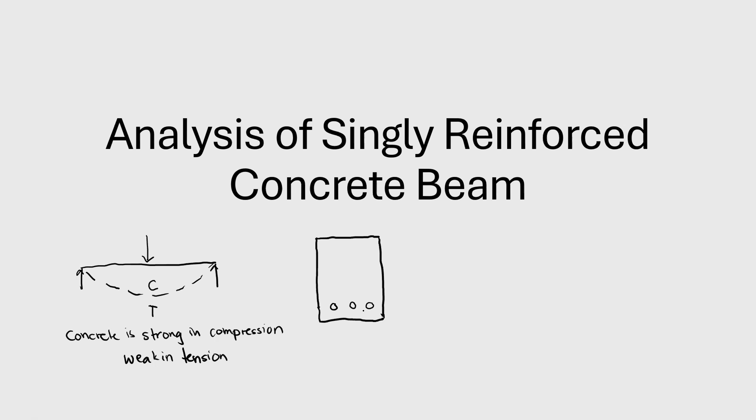For now, discuss muna natin yung pagiging single lang muna. Sa tension lang tayo maglalagay ng reinforcement, sa tension side, ang merong reinforcement. Halimbawa, ito yung ating concrete beam section.

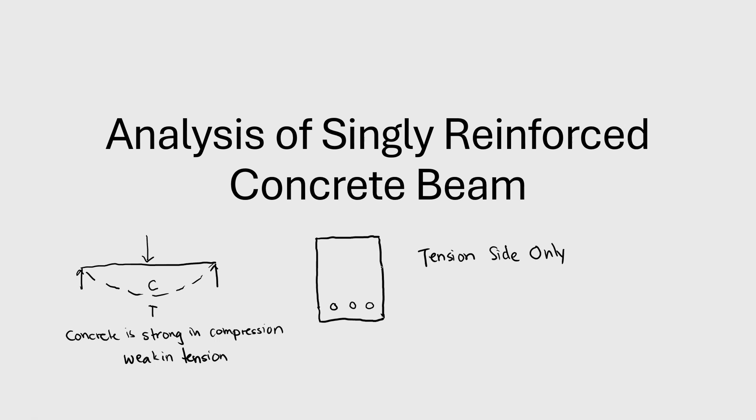Tingnan natin ano yung mangyayari sa beam natin. Ito yung tinatawag natin ang crack section. Initially, meron tayong width ng ating beam, yung B. D is the effective depth of your beam section. At yung AS naman is the area of your reinforcement.

Yung AS natin, we're just assuming or representing it into a single circle, isang circle lang muna. Kumbaga, halimbawa 5 yung bakal na ginamit mo, we can represent it into one single figure, kasi pare-pareho lang naman yung location nila based from the depth of their position. Kung base sa compression side, pababa, puro ang distance lang naman nila ay D, yung tinatawag nga natin effective depth of your tension reinforcement.

Sa analysis natin ng reinforced concrete beam, hinahayaan natin na mag-fail yung ating concrete sa tension, o mangyayari, mababasag yung concrete. Pag nabasag yung concrete natin, kasi weak in tension, ganito na yung mangyayari, magiging crack section na. Itong portion na to sa baba, basag na yan. Kumbaga, wala nang tibay yung concrete at the bottom. Therefore, on this side, ito yung tension side natin.

Kaya yung neutral axis is somewhere here at the middle of your beam section, pero hindi yan saktong gitna ha. Hindi na yan katulad nung homogeneous material na rectangle, na sa gitna yung kanyang neutral axis. Kasi involved na tayo ng reinforcement, may bakal na, kaya hindi natin alam kung saan yung location ng neutral axis natin.

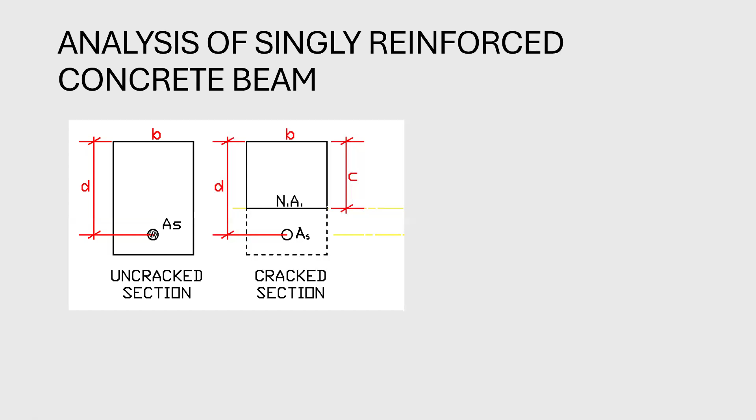Ngayon, kung titingnan natin yan, ganyan yung itsura ng ating section ngayon. Kung remember niyo doon sa ating flexural stress ng ating beam, ganito yung naging stress diagram ng ating beam section. So instead of uniform triangular stress diagram, ang makikita natin hindi na ganon. Sa reinforced concrete, base sa many studies, ganito ang nakita nilang diagram ng ating stress sa ating beam section.

Sa concrete, this is somewhat like parang rectangular, and then biglang nag-curve pababa papunta sa neutral axis until it becomes zero yung stress natin sa neutral axis. And that value is equivalent to 0.85 F prime C. Ano ba yung F prime C? That is your compressive strength or yung compressive stress doon sa ating concrete. Then, yung sa ating bakal naman, don't forget, even though basag na yung ating concrete, may bakal pa tayo, kaya meron tayong stress doon sa ating bakal, which is what we call yung Fs natin.

Yan ang ating stress diagram. Kaya lang, pag ina-analyze natin yan, halimbawa gusto natin makuha yung moment ng ating beam na kinikerry with that value of stress, so doon sa flexural stress natin, yung principle niya, mahirap. Mahirap kunin yung resulta ng ganitong stress diagram, di ba? So anong gagawin natin? Ginawa ng mga engineers, syempre medyo tinatamad sila mag-compute ng ganyan, mag-compute pa ng equation, di ba? So mahirap. So ginawa nila ay minodify nila yung stress diagram into simpler form.

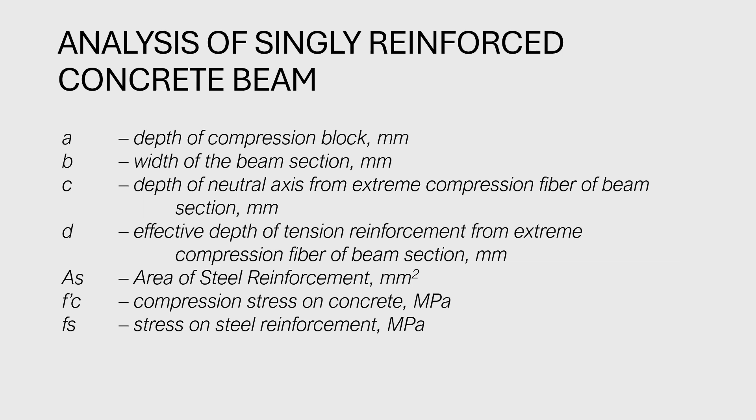Again, yung concrete ay under compression, kaya yung direction niya papunta sa left and then papunta sa right, yung ating Fs. So ito yung tinatawag nating equivalent stress diagram. Then, ito yung mga notation natin para doon sa mga letters or variables na nakikita natin doon sa ating diagram kanina. Ngayon, ito yung binabanggit ng section 422.2 about the design assumptions for moment and axial strength ng reinforced concrete members. So una, sabi, equilibrium and strain compatibility.

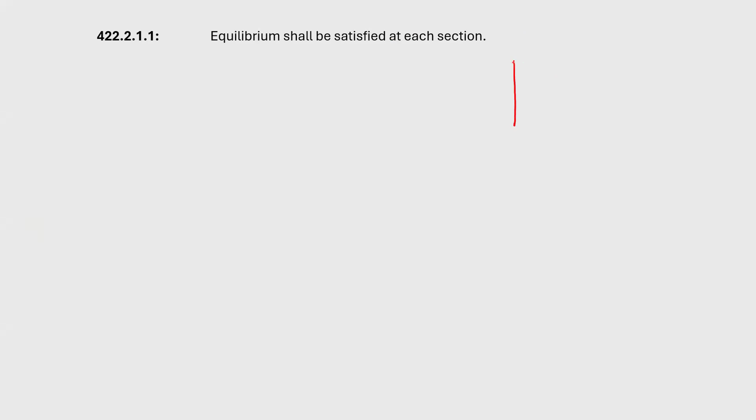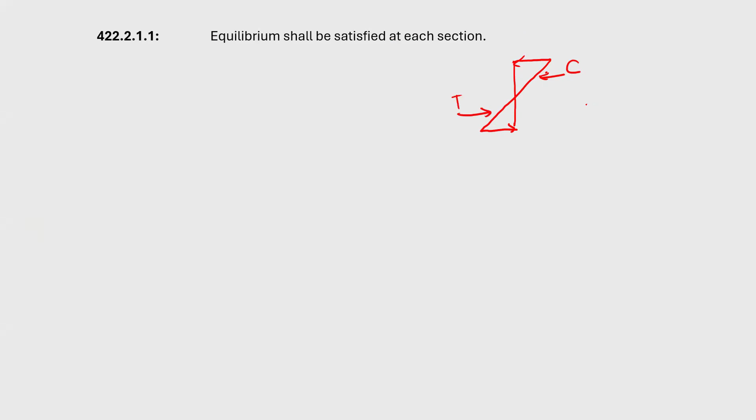So equilibrium, sabi, shall be satisfied at each section. Sabi sa atin, dapat maintain yung equilibrium. Kaya ano ating na-discuss dun sa principle of flexure stress, na sabi sa atin that ganito yung ating stress diagram. Okay? So ito yung compression, ito yung tension. So meron siyang equivalent na concentrated load, and tension. And based on the principle, compression must be equal to tension. Yan yung tinatawag equilibrium, no, at each section. So kailangan magawa natin yan.

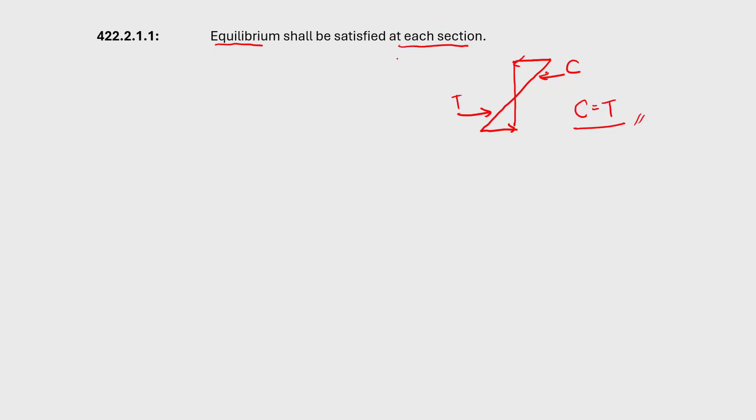Ngayon naman, pag-usapan natin yung reinforced concrete. You remember, ito yung equivalent stress diagram ng ating concrete. Napapansin natin that yung stress dito is rectangular. So therefore, yung equivalent concentrated load niya is nasa gitna. So let's name it as C for compression. Ito naman yung sa tension natin para sa steel. Okay? Again, yung nag-hold ng ating compression ay concrete at yung sa tension naman ay yung steel natin.

Ngayon naman, let's compute yung value ng compression force natin dito sa ating concrete. Balikan natin ulit yung principle ng stress na sigma is equivalent to P over A. And yung force P can be computed using sigma times A. So yung stress natin dito sa concrete is 0.85 FC prime. So therefore, yung C natin is equivalent sa 0.85 FC prime. Okay? Then, aside from that, yung area.

Balikan natin ating figure. So ito yung ating stress diagram. And then, kung ipa-plot natin siya papunta dito sa ating concrete section, so yung area kung saan nag-act yung ating concrete compression force is dito with the depth of A. So yung depth niyan ay A. So therefore, yung area niya is A times B. So yung area ay A, B. So ito yung ating equivalent concentrated load sa ating compression.

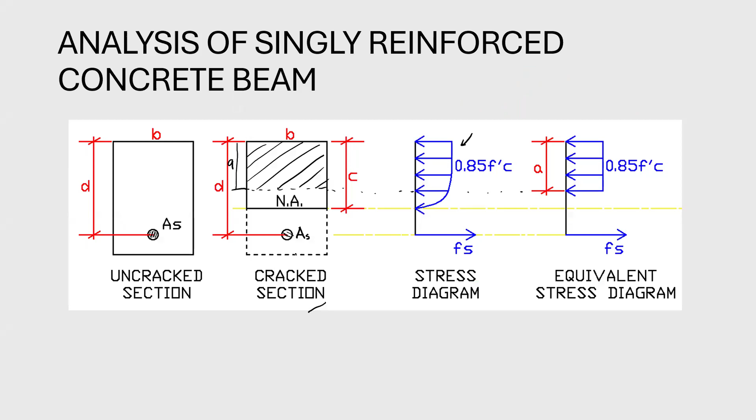Ngayon naman, sa tension side naman tayo. So saan ba nag-act yung Fs natin? Kung ipoproject natin yung Fs, mapapansin natin na yung area is yung sa steel. Dito tayo mag-focus sa crack section. So therefore, yung area is As. So yung Fs natin, siya yung ating stress. So therefore, yung ating tension is equivalent sa Fs times As. Therefore, ito na yung ating compression at tension.

Then, we can perform now yung equilibrium condition. So sabi nga natin, compression is equivalent to tension. Let's say the equilibrium condition. So sabi nga natin that C is 0.85 FC prime AB that is equivalent to AS FS. So ito yung isa sa mga general formula na gagamitin natin when we are analyzing yung ating singly reinforced concrete.

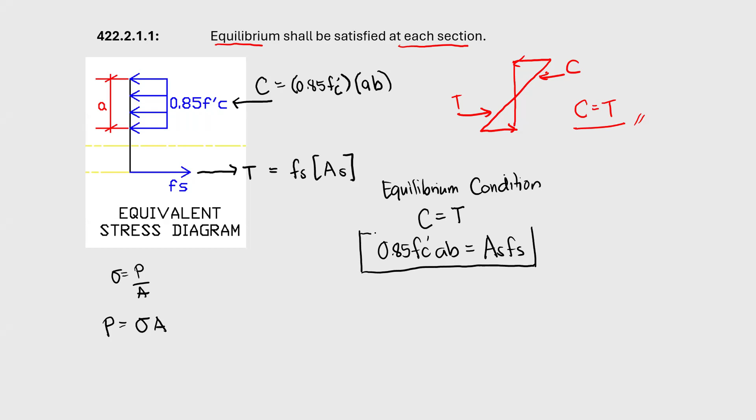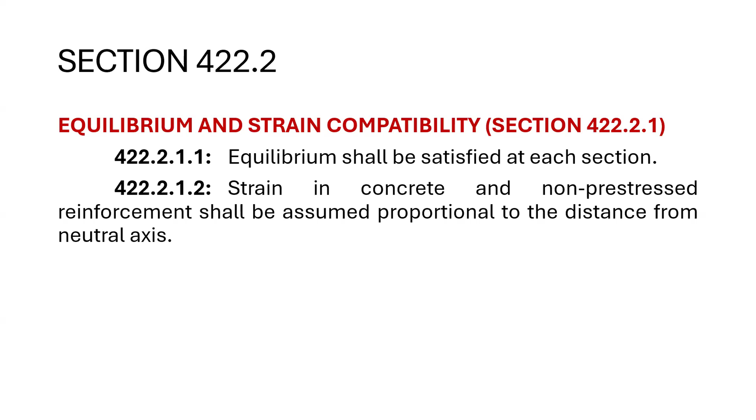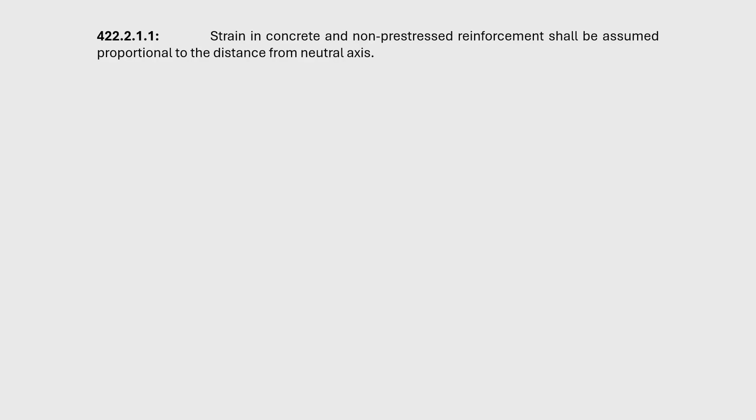Ngayon naman, sa pangalawa, ayon sa section 422.2.1.2, yung strain in concrete and non-pre-stress reinforcement shall be assumed proportional to the distance from neutral axis. Kung sinasabi dito na proportional dapat yung strain ng concrete saka yung reinforcement based from the neutral axis is ganito. Ito yung crack section natin at ito yung strain diagram. So sa concrete, ito yung strain of concrete. And then, habang pababa siya ng pababa sa neutral axis, nagiging zero yung strain. Then, habang papalayo na papalayo ulit, then tumataas naman yung strain doon sa tension side. And ito yung nagiging strain of your steel.

This concept must be applied when we are analyzing our beam. According to Section 422.2, this is the design assumption for concrete.

The first assumption states that the maximum strain at the extreme concrete compression fiber shall be assumed equal to 0.003. So what we saw earlier about the strain of concrete, this is the maximum we can use. We cannot exceed that.

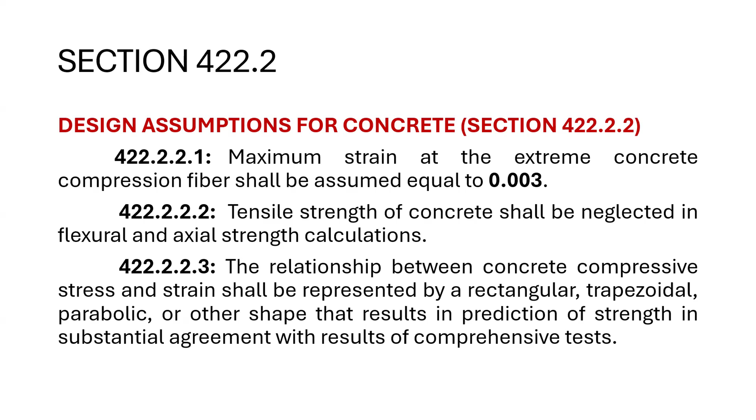For the strain, it is triangular. We assume that the strain is proportional between the concrete and the steel. As the code said earlier, the strain of concrete is maximum 0.003. Then for the strain of steel, let's go back to the principle of modulus of elasticity E.

We said that modulus of elasticity E can be computed using stress over strain. So to compute the strain, this is just the quotient of stress over our E, or the modulus of elasticity. So as a symbol, strain is equivalent to sigma over E.

So we will use this principle to find out the strain of the steel. For our steel, let's say this is a point located at the depth D of our beam. So the strain of the steel is equivalent to the stress of the steel, which is Fs, divided by E. Let's say this is E for the steel. So this is what we'll use now to compute other relationships in our beam.

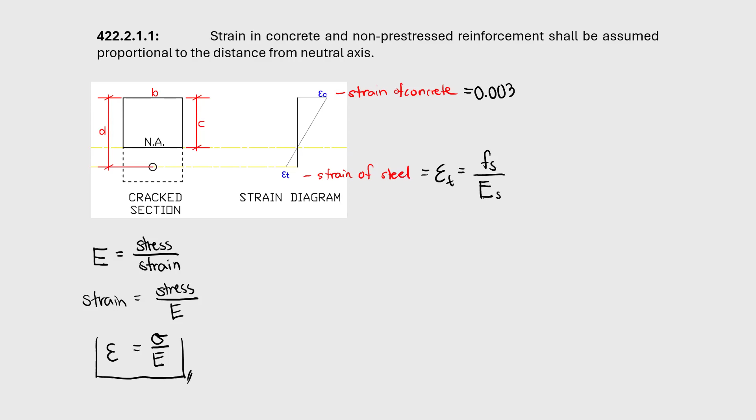So using these two values, 0.003 and the strain of steel Fs over Es, we can make a relationship between the two. We will note that this is the effective depth, D. And this one going down is C, which is the depth of the neutral axis. So we have two triangles that can make a relationship.

First is the triangle for the strain of concrete, that is Ec over C. And that is also proportional to the strain of the steel tension reinforcement divided by D minus C. If you remember, our Ec is 0.003, and our Et is Fs over Es, divided by D minus C.

We know that the modulus of elasticity of steel is equivalent to 200,000 megapascal. This is a constant value of modulus of elasticity of steel. So by substituting into our equation, we have Fs divided by 200,000, divided by D minus C. So therefore this becomes 0.003 times D minus C over C, equivalent to Fs over 200,000.

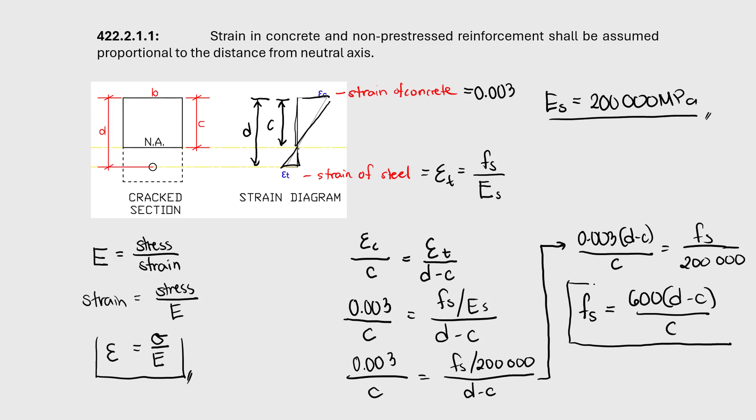This is assuming that we consider the maximum strain that the concrete can take is 0.003. Again, this is our design assumption. Of course, when we design, we want to use the maximum capacity of our concrete. The capacity of concrete, to maintain its strength, we consider that its strain should be maximum of 0.003. For steel, we also have a limit.

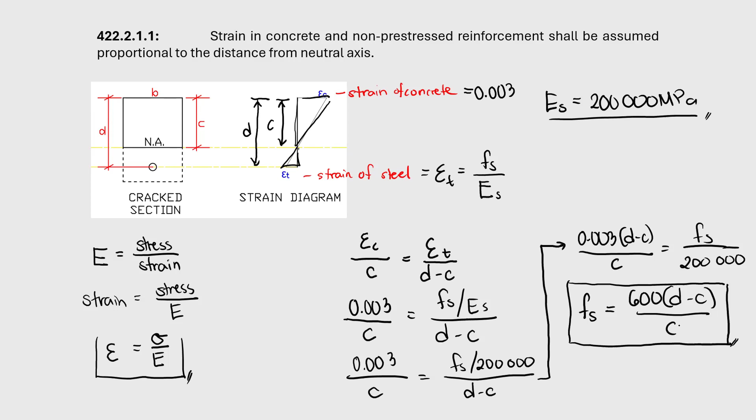Ngayon, ito naman yung tinutukoy sa steel reinforcement, yung design properties niya, under section 420. So for non-pre-stressed bars and wires, ang tinutukoy na stress dito is yung Fs. If yung Fs ay below the yield strength of steel o yung Fy, ibig sabihin Fs is less than Fy. Sabi daw, gagamitin natin ay Fs equivalent sa modulus of elasticity of steel times yung strain niya. Based sa formula natin, strain ng steel is Fs over Es. So dyan siya nanggaling, yan yung ating formula: 600 times D minus C over C. Yun ang gagamitin natin for Fs.

Pero for the strains greater than the corresponding to Fy, nangyayari kasi pagka ganyan, yung strain natin is greater than sa corresponding value to Fy. O sa ibang notation, pwede nating sabihin na if Fs is greater than Fy, nag-yield na yung ating steel kasi lumagpas na siya sa yield strength. Ang gagamitin natin na value ng Fs ay equivalent sa Fy. Itong condition na ito, yung Fs less than Fy, ito ay does not yield condition. Tapos yung Fs na greater than or equal sa Fy, dahil pagka yung Fs is equal to Fy, yielding pa rin siya, so still yields.

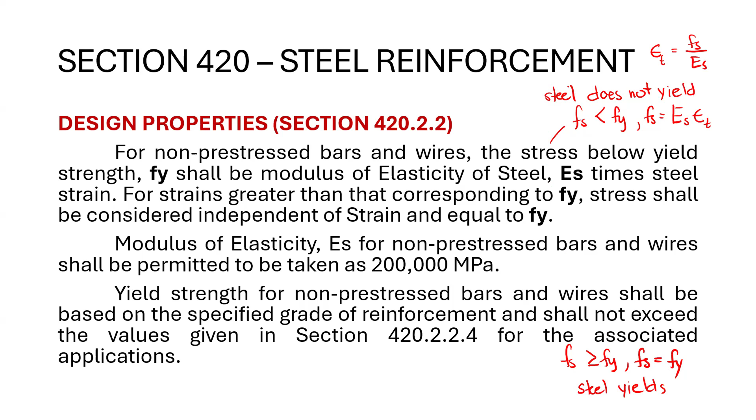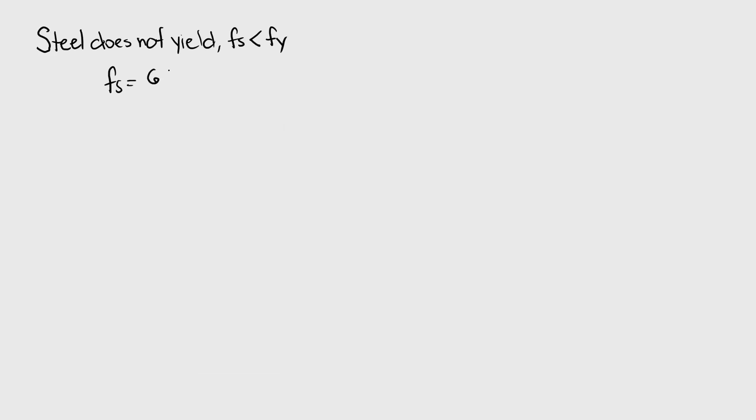Yan yung isa sa mga consideration na kailangan natin gamitin sa design and analysis ng reinforced concrete. Aside dun, isa pa sa discussion ng design properties under section 420, yung modulus of elasticity of steel ay dapat 200,000 megapascal, naka-indicate sa NSCP. So sa summary: kapag ang steel natin does not yield, kung saan ang Fs natin less than Fy, yung Fs natin should be computed using this formula. Then for steel yields, kung saan ang Fs natin is greater than or equal to Fy, yung Fs natin should be equivalent to Fy.

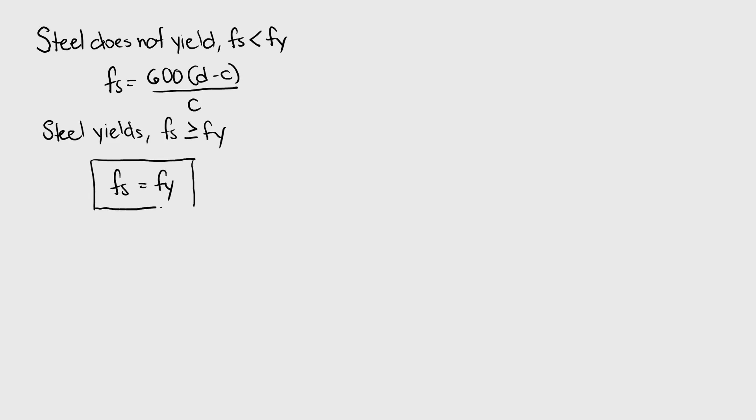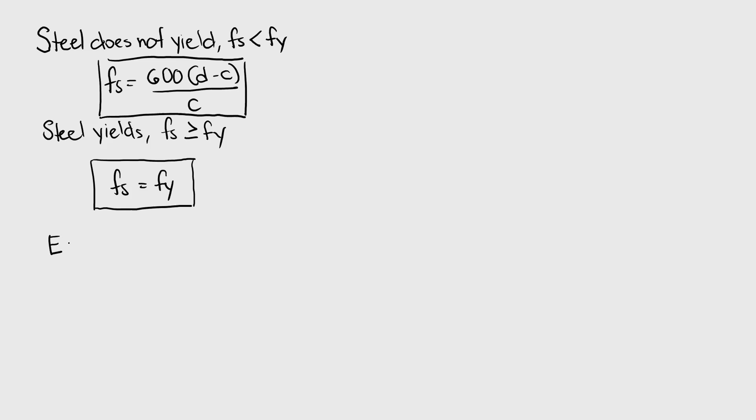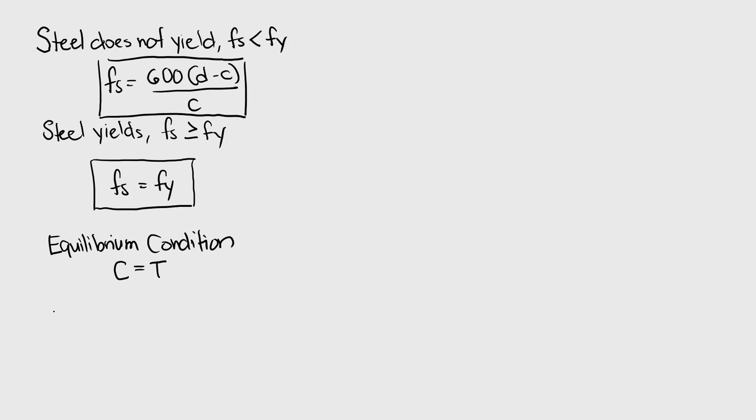Aside dun, kanina na binanggit natin yung equilibrium condition. Sa equilibrium condition, yung C natin ay equivalent sa T. At alam natin na yung C natin ay 0.85 Fc prime AB, at yun ay equivalent sa AS Fs.

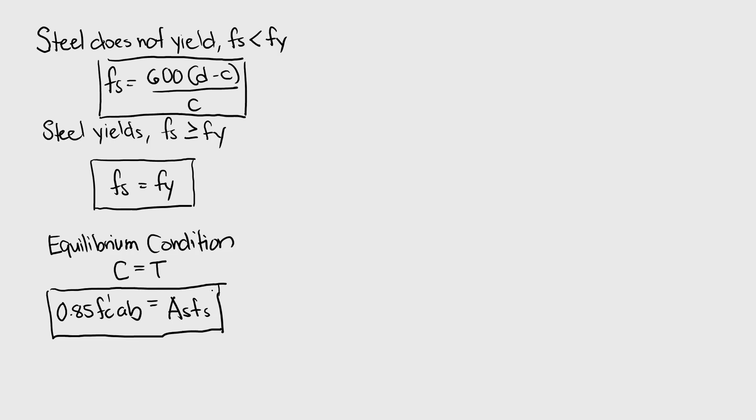Yung compression natin dito ay 0.85 Fc prime AB, at ito naman ay AS Fs. Kung capacity ang pinag-uusapan natin, dapat gamitin natin ay yung strength talaga ng concrete, yung capacity. Kaya ang gagawin natin sa FC prime ay ang compressive strength ng concrete. Alam niyo na rin na ang basis ng ating calculation ay based sa strain ng concrete na 0.003. Kaya aside sa pagiging nasa maximum capacity ng strain ng concrete, nandun din tayo sa maximum capacity ng concrete in terms of compressive strength, kaya yung compressive strength natin ay yung FC prime.

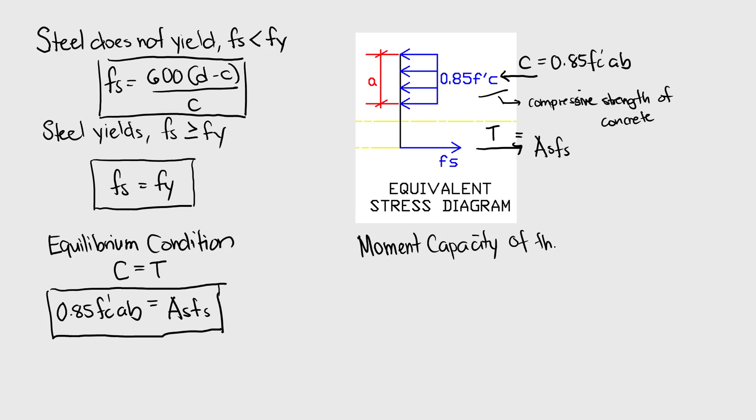Therefore, makukumpute na natin yung capacity, moment capacity ng ating beam. The moment capacity of the beam, let's say this is Mn, minsan ito ay tinatawag na nominal moment capacity. Kumbaga, ito yung talagang raw strength ng ating beam based on the strength of the concrete at saka yung strain ng ating steel. Ganun pa rin yung concept na kailangan nating alamin, yung ating couple at saka yung kanyang moment na makikreate. Ito yung couple natin, compression and tension, at ito yung pinaka-distance nila. Ang tanong ay, ilan ba yung distance between your compression and tension? Sabi nga natin, compute your moment, it's either C times D, o gawin natin distance Y na lang.

Kasi yung D ay ginamit natin as effective depth. Ang effective depth natin, ito, effective depth D. So pwede natin C times Y, or pwede na rin tension times Y. Ako, mas preferred ko yung concrete ang ginagamit sa compression side, kasi mas madali siyang i-project compare sa steel, especially kapag nag-progress na tayo with other type of beam, pagka mga irregular shape or pagka doble.

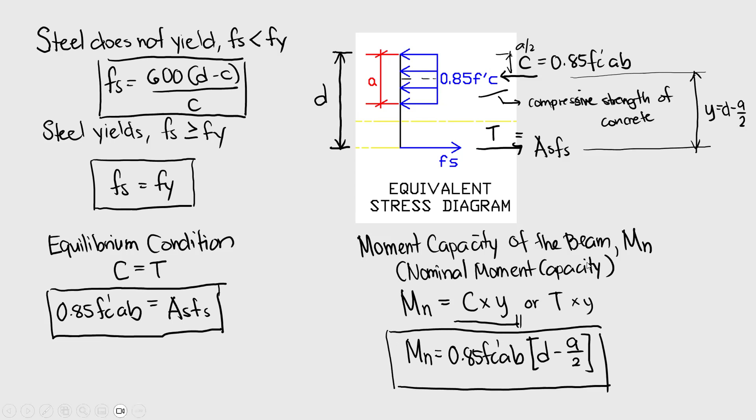Kumbaga, ito yung actual or let's say factored, no? Factored moment. So sabihin nito, ito yung actual na kine-carry ng ating beam, pero naka-load combination siya. So yung load combination will be discussed in separate discussion. So muna ang i-discuss natin is about yung sa MU. Again, Mu is designing moment or yung factored moment. Then, of course, para masabi natin na safe yung ating beam, dapat hanggat maaari, equal, no?

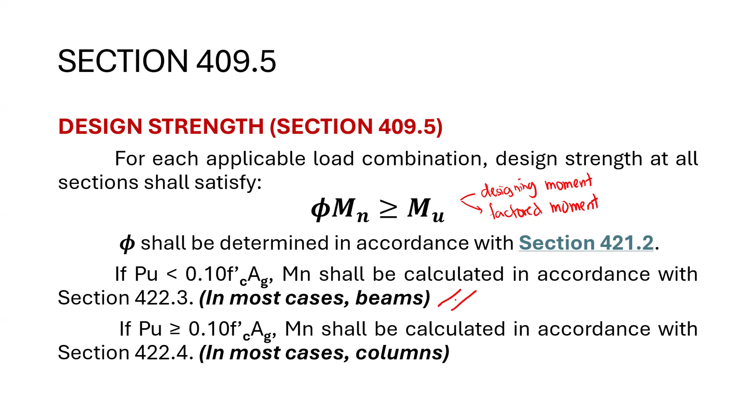So dapat yung PU niya should be less than 0.1 FC prime Ag. Pero kung malaki na yung PU natin, so i-consider na natin siya as columns. But for now, ito muna i-consider natin, yung PU is less than 0.1 FC prime Ag. Ito yung tinutukoy natin about sa section 421.2 para sa phi o yung tinatawag nating strength reduction factor.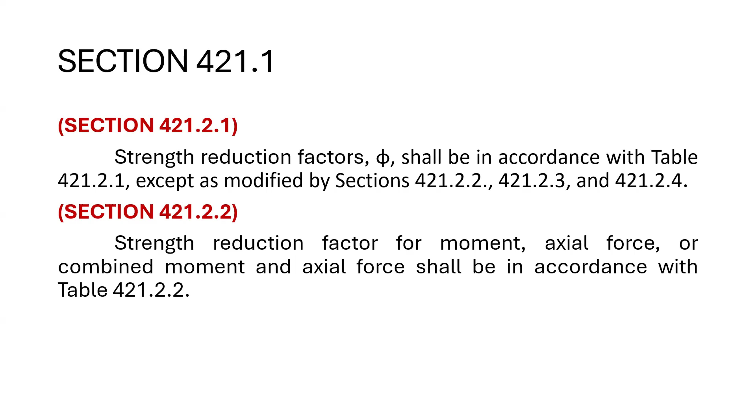So under section 421.1 and then section 421.2.1, ang sabi dito, strength reduction factors phi shall be in accordance with table 421.2.1 except as modified by section 421.2.2, 421.2.3, and 421.2.4. So under 421.2.2, ang sabi ay strength reduction factor for moment, axial force or combined moment and axial force shall be in accordance with table 421.2.2. So ito siya, yung table tinutukoy. Then yung isa naman, yung 421.2.2, ito naman. Okay?

So una muna, i-discuss natin isa-isa about sa action or yung structural element natin. Pagka yung ating member is experiencing moment, axial force, or combined moment or axial force, so yung ating reduction factor ay between 0.65 to 0.9. So ito ay may exemptions. So kapag pretension members, no, where strands are not fully developed, hindi natin pwede gamitin.

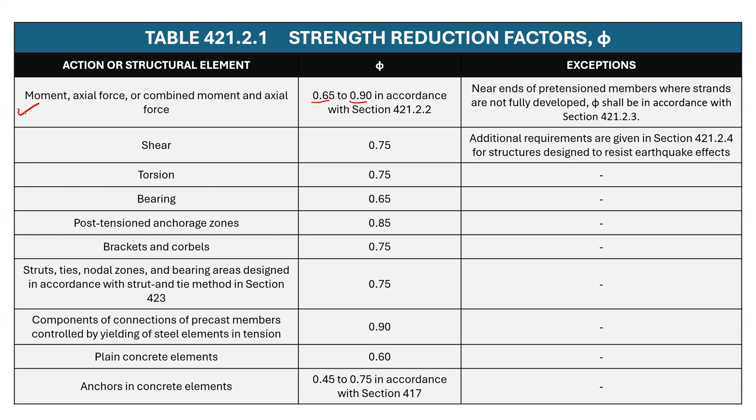Ngayon, yung pag-usapan natin is for moment lang muna, kasi ang ating discussion is all about the singly reinforced concrete beam, so yung beam is commonly carrying a moment. Yung sa shear, torsion, bearing, at iba pa, ay later na natin siya. Focus lang muna tayo dito sa first part about sa moment. Sabi, section 421.2.2 ang gagamitin natin. So ito yung sabi ng 421.2.2, strength reduction factor, for moment axial force or combined moment and axial force.

So dito, meron tayo ditong ET. If you remember, yung ET is the strain of your steel. So sabi daw yung ET, it should be less than or equal to ETY. Ano ba yung ETY dyan na tinutukoy? Yung value ng ETY, sabi dito, no, for deformed reinforcement, yung ETY shall be computed using Fy over Es. So for grade 420, deformed reinforcement, it shall be permitted to take ETY equal to 0.002. So this is just parang additional lang itong second statement na we can assume that as long as yung ating steel is grade 420, pwedeng 0.002 na lang yung ETY.

In most cases, we can compute the ETY using the formula given above. So again, the ETY is the strain of the steel at the yield strength Fy of the steel. Then the ET is the strain of the steel at a given stress Fs.

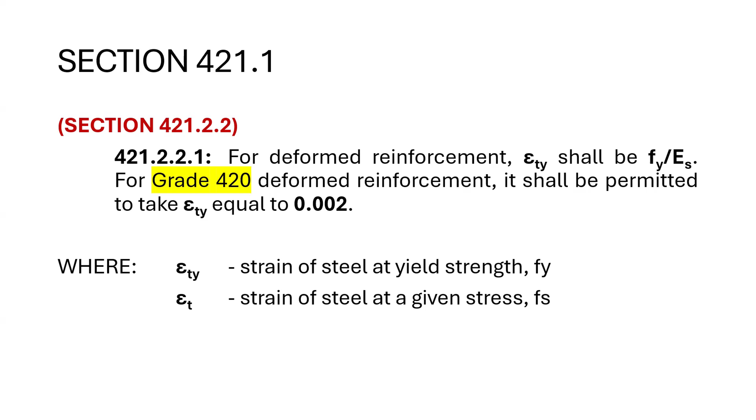Now that we know the meaning of ETY, we can discuss this table to compute our reduction factor phi. If our ET is less than or equal to ETY, it's either 0.75 or 0.65, depending on our transverse reinforcement. Spiral is common for columns, so since we don't have spiral in a beam, we use others. So if ET is less than or equal to ETY, it's 0.65. Then if our ET is between ETY and 0.005, we use this formula.

0.65 plus 0.25 times ET minus ETY over 0.005 minus ETY. Then if our ET is greater than 0.005, automatically our reduction factor is 0.9.

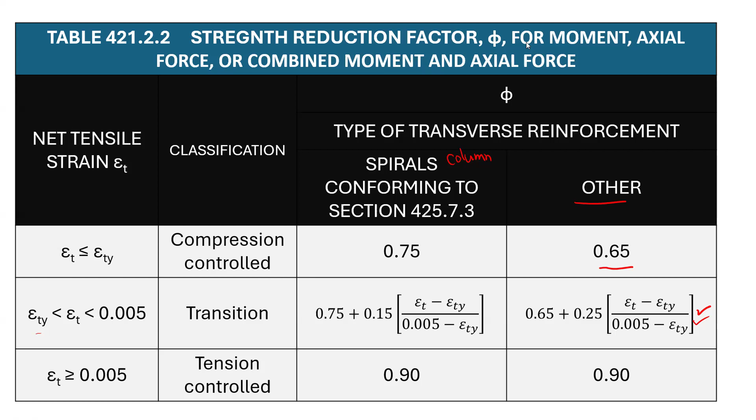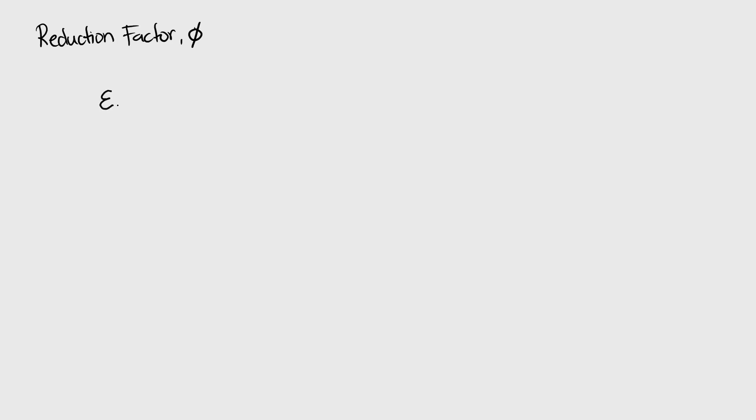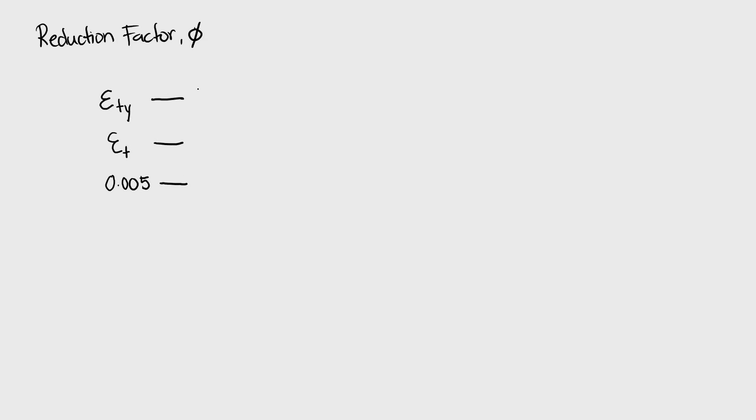We can actually derive this formula using interpolation. So here's how: we place ETY, then this is the strain of our steel, and the maximum strain is 0.005. The corresponding value at ETY for our reduction factor is 0.65. Then this is the unknown reduction factor, and this is 0.9. This is how we can compute our reduction factor when the value of ET is between ETY and 0.005.

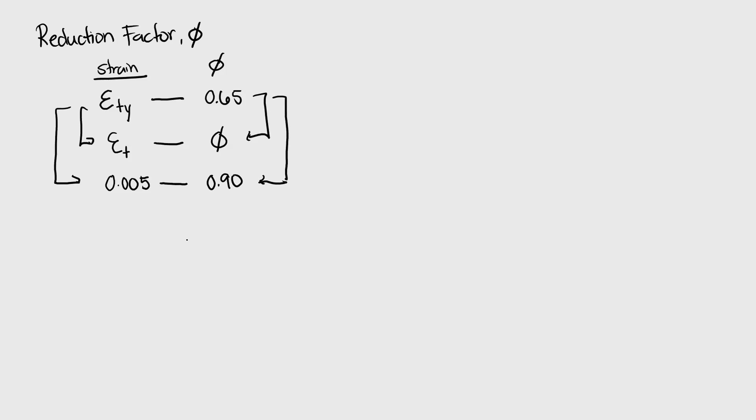Using this interpolation, let's try to compute. So let's say the unknown reduction factor minus 0.65, divided by 0.9 minus 0.65, is equivalent to ET minus ETY over 0.005 minus ETY. So that's how we can compute our reduction factor.

Don't forget that our ET can be computed using Fs over Es. These are the formulas we can add to our computation.

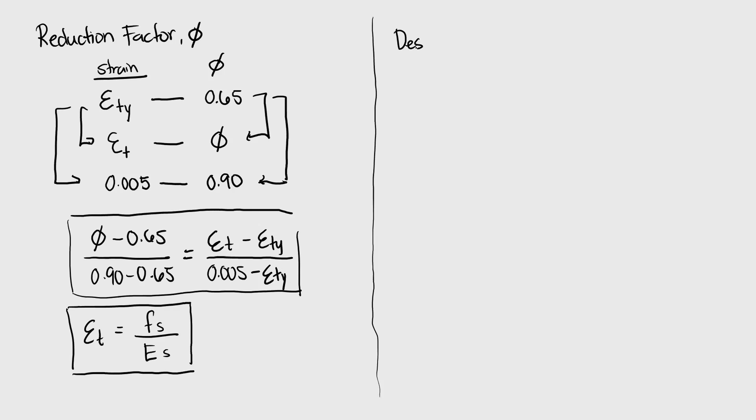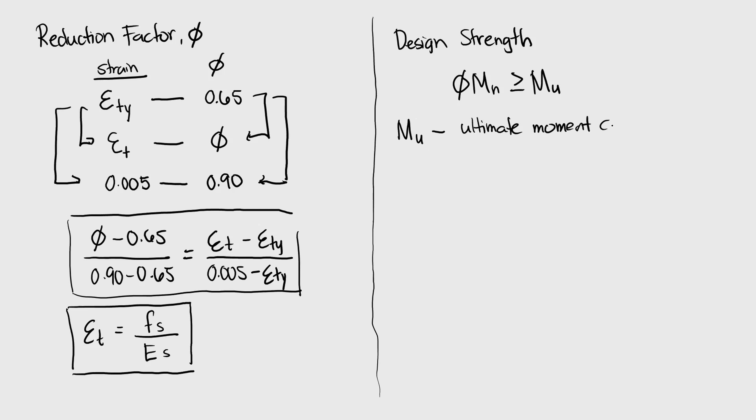Since this is based on the design strength of our beam, let's add this too. Design strength, which we discussed earlier - our PhiMn should be greater than or equal to Mu. Mu can be written as the ultimate moment capacity, or sometimes others use design strength.

Now let's discuss how we convert C into A or vice versa. Because we are trying to simplify our stress diagram of concrete into a rectangular shape, since it's hard to analyze when the stress diagram is too varying.

Where can we find the conversion of A to C? According to section 422.2, design assumptions for concrete state that the equivalent rectangular concrete stress distribution, in accordance with section 422.2.2.4.1 through 422.2.2.4.3, satisfies section 422.2.2.3. Simply put, the concrete stress of 0.85 FC prime shall be assumed uniformly distributed over an equivalent compression zone bounded by the edges of the cross-section and aligned parallel to the neutral axis, located at distance A.

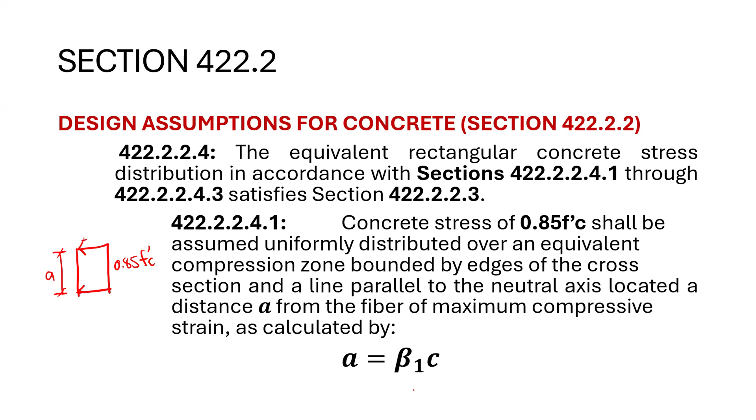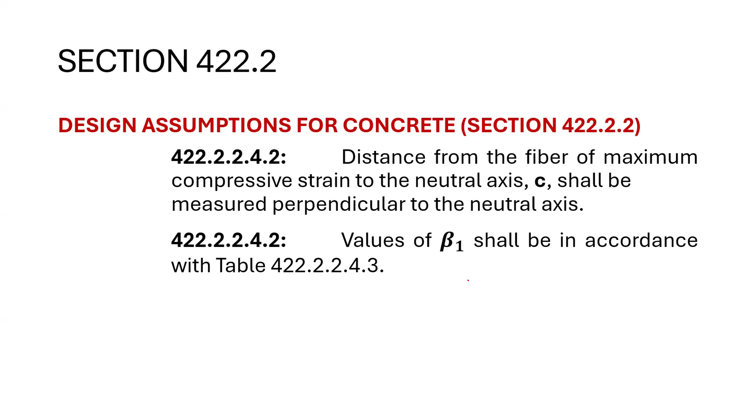A is the depth, with an equivalent stress of 0.85 FC prime. We can compute A by multiplying our C, the depth of the neutral axis, by beta 1. How do we compute beta 1? The values of beta 1 shall be in accordance with the table in section 422.2.2.4.3.

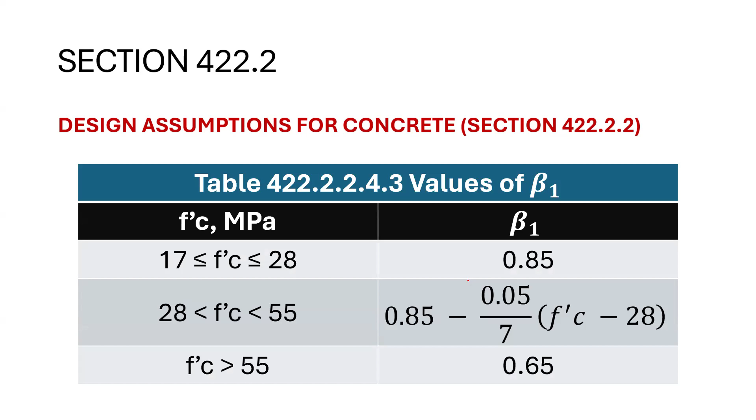This table is based on the value of FC prime. If FC prime is between 17 to 28, beta is 0.85. But if FC prime is between 28 to 55, we use the formula 0.85 minus 0.05 over 7 times FC prime minus 28. And if greater than 55, automatically our beta is 0.65.

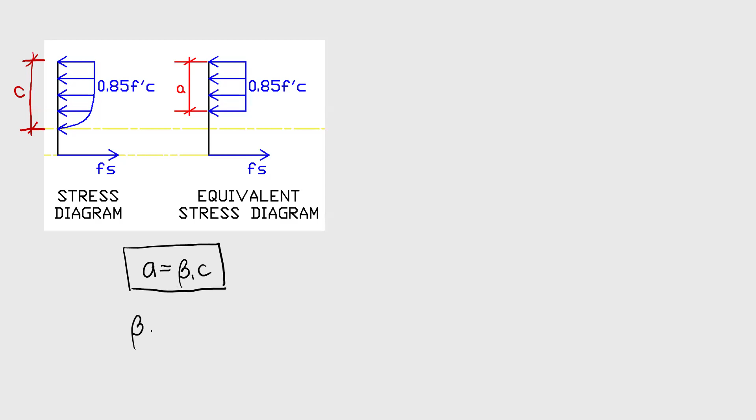So to convert C into A, that is A equals beta 1 times C. This is another formula, and our beta is based on FC prime.

I think we already have all the discussion related to our singly reinforced concrete beam. I think we are now ready to take an example problem to understand how to compute our singly reinforced concrete beam when it comes to moment capacity.